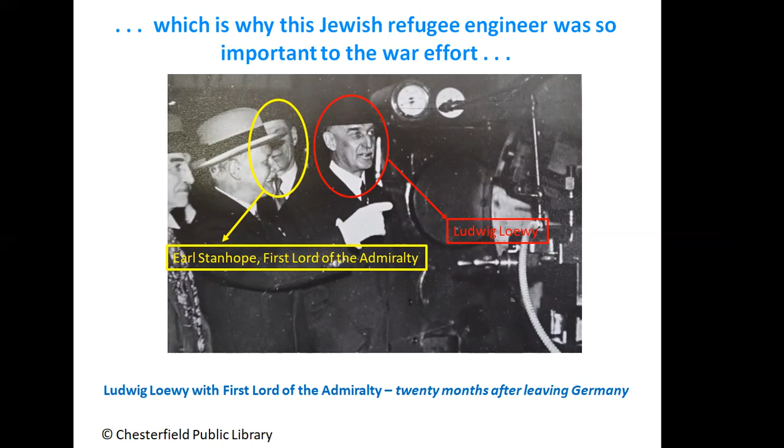We see here Ludwig Loewy with the First Lord of the Admiralty, 20 months after leaving Germany. We have Ludwig here on the right as a guest of honour at the opening of the Chesterfield Heavy Tube Department. And there behind his shoulder is Earl Stanhope, First Lord of the Admiralty, who was the political head of the Navy, subsequently supplanted by Churchill himself not long after this photo was taken. So Ludwig Loewy is going to turn out to be rather crucial to the story of rearmament and aircraft development, and he was, as you'll discover, going to become something of a celebrity engineer during the early wartime period.

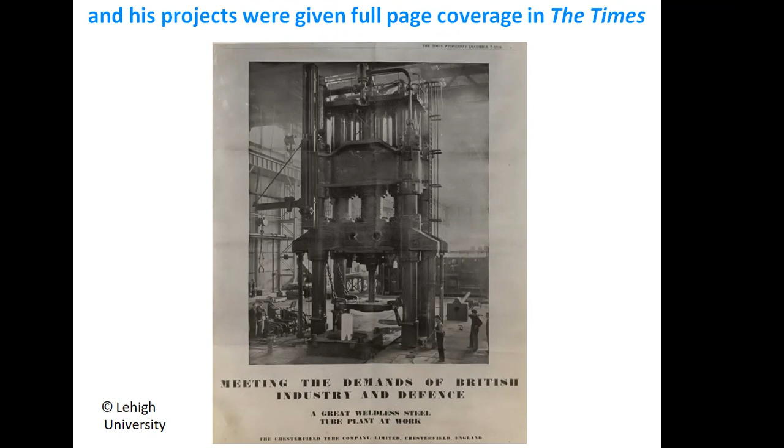For instance, here is an example: his projects were given full page coverage in the Times. Movietone News turned up to the opening, and the BBC sent one of the various Dimblebys who were around at the time to cover the opening. This is all within a few months of him coming as an exile to Britain. So Ludwig Loewy is going to turn out to be crucial to the British war effort.

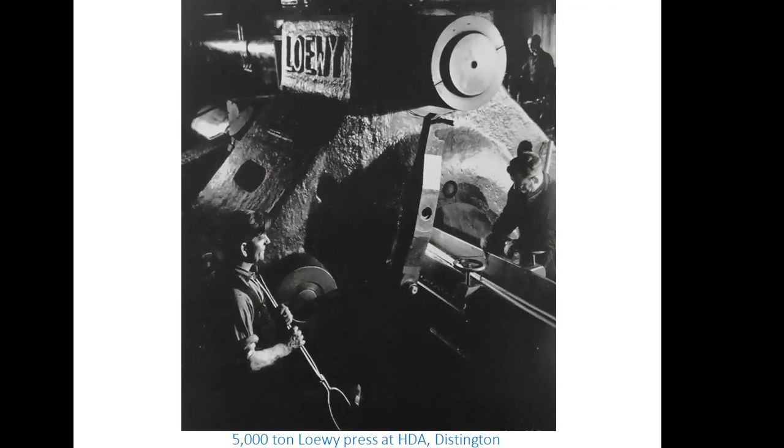But in order to explain why he was so important to the war effort, I first have to tell you one or two basic facts which are not familiar about the way in which Britain rearmed during the 1930s. And one particular key component that I'm going to talk about is extrusion presses.

Ludwig Loewy's German firm, Schloemann, from which he was exiled, dominated the global supply of extrusion presses, which were essential for forming aluminium alloys for the new generation of aircraft. This is one with his name on it, Loewy, up at Distington in Cumbria at a high-duty alloys factory that they developed from 1940 onwards.

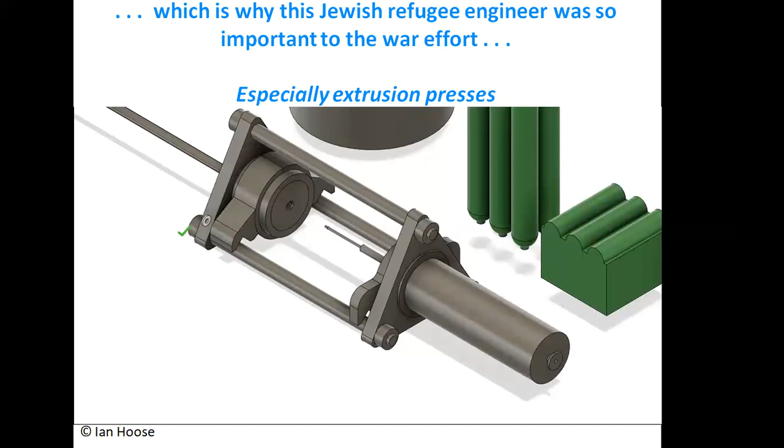But just in case you're unfamiliar with extrusion presses, let me give you an animated example. With luck, this will work. What you can see is some hydraulic cylinders in the background and some cylinders that move. So what you do is you push a hot billet, there a mandrel comes forward, puts a hole in it, and then it pushes the hot billet under tremendous pressure through to form a tube coming out the other end. It's a way of forming aluminium alloys, stainless steel, and a number of other useful wartime materials.

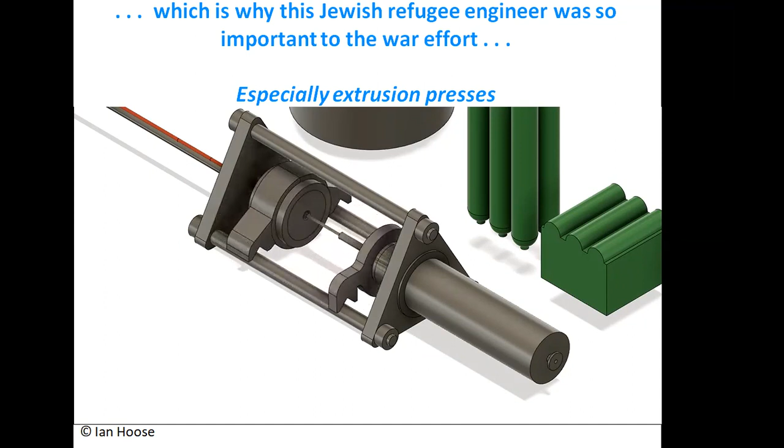Unfortunately, this technology was dominated by the Germans.

Okay, let me shock you with 4 facts about Britain's pre-war rearmament.

The first one is just how far and how fast UK aircraft production expanded during the 1930s. Between 1934 and the height of the bomber program in 1944, UK aircraft output, adjusted by weight and volume and complexity, rose almost exactly 100 times, 100-fold. So imagine any other industry in a decade, in 10 years, expanding 100-fold, most of that between about 1936 and 1942.

Secondly, as I will illustrate, aircraft switched from being a branch of the furniture industry, because they were fabric-covered wooden biplanes, to monoplanes made of these modern sophisticated aluminium and magnesium alloys.

Okay, that much may be familiar to those of you who are very keen on going to air shows and keen on the way the aircraft industry developed. Facts 3 and 4 are somewhat more unknown and shocking.

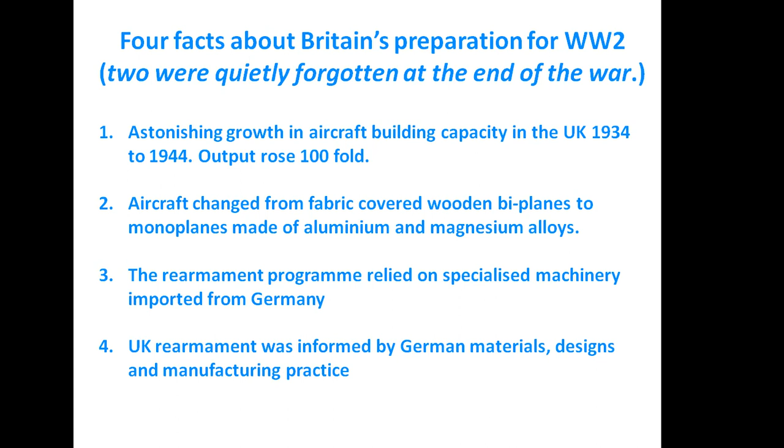Okay, so to sum up, the RAF that won the Battle of Britain depended almost entirely on German machinery and know-how imported into Britain. All right.

Now, in this crazy world that we have in the 1930s, some famous German planes were, of course, prototyped with Rolls-Royce engines in unusual places like Sweden. So I believe, for instance, the Stuka and the ME-109 first flew with Rolls-Royce engines.

So having upset some of your preconceived notions, let's develop some of these points in more detail.

So first of all, it's very hard to measure the output of the aircraft industry in 1934 because no one bothered collecting statistics. It was very easy to establish how many horses there were and whether they were employed by the railways or in heavy draft or for recreational purposes. But the aircraft industry, no one's interested in that. So the official statistics are almost silent, certainly until 1935, on these things.

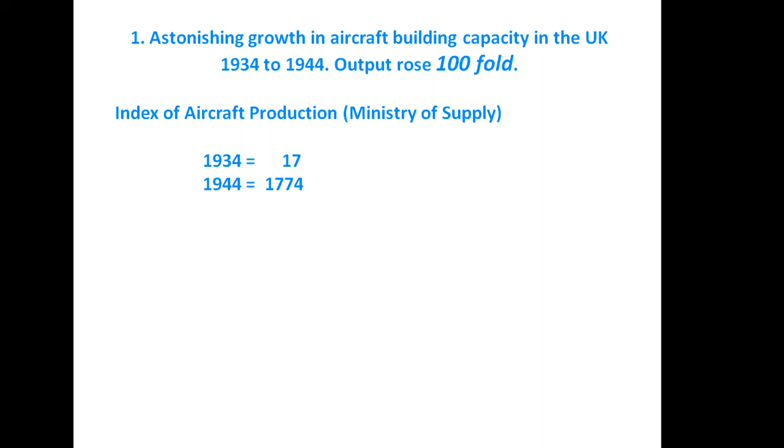But you can construct an index which goes from, as you can see, from 34 to 44. So if that index is 17 in 1934, it's literally risen by slightly over 100 times by 1944, by the height of the bomber program.

Secondly, as I said, there was radical change in aircraft design. So much so that when rearmament was being planned, the government didn't actually know what type of aircraft they would be needing when the factories were being built as part of the shadow factory program and as part of the extension of the existing aircraft factories.

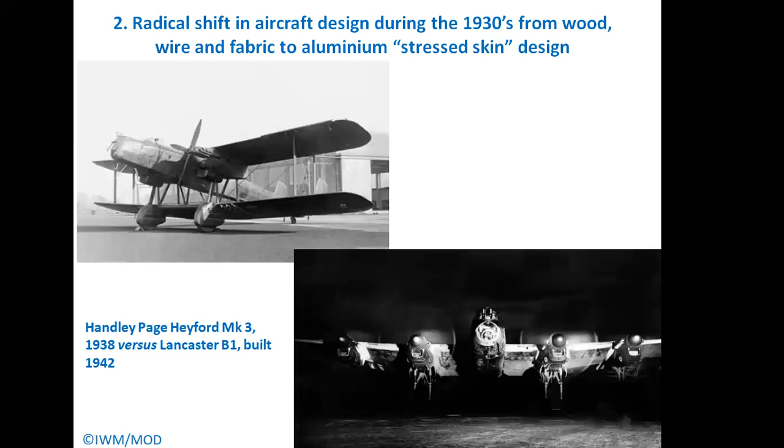In order to supply this new industry, a complete new basic industry emerged to manufacture and fabricate aluminium alloys and magnesium alloys in the UK for aircraft.

Four or five firms, all private, expanded rapidly on the back of a phenomenally fast-growing market, in the hope that peace wouldn't break out. Otherwise, they'd have been left with a hell of a lot of German equipment. And then...

the government eventually moved in. This, for instance, is a shadow factory first built on land at the back of Workington, at Distington in Cumbria, for high-duty alloys. We'll see some others as we go on.

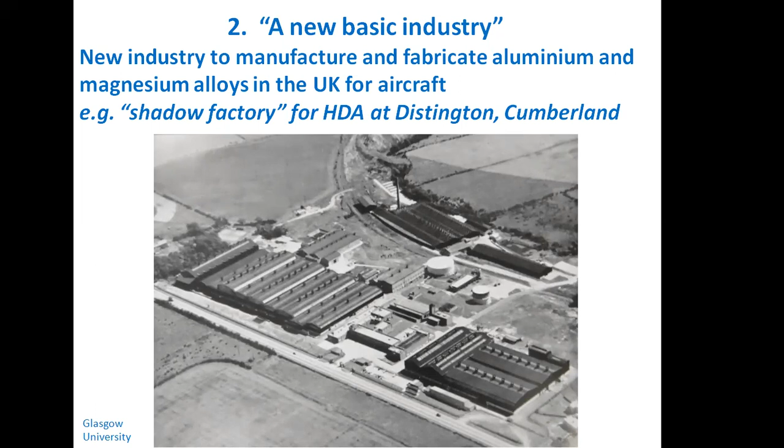So a complete new industry emerged to supply the new generation of aircraft. Some of you may remember your grandparents talking about the drive for saucepans and kettles. It's a myth that they weren't useful. It turned out that saucepans and kettles were a better source of aluminium than much of the scrap that was lurking around at the time. They turned out to be ideal for alloying into aerospace materials. But about the time of the Dunkirk evacuation, there was this scrap drive to collect old saucepans and kettles. That was just one symptom of this rise of a new basic industry.

But why should we depend upon the Germans? Well, the answer is the Germans had total leadership in aluminium and aluminium alloys during the 1930s. Not the Americans, who had barely begun. The Canadians were producing the raw metal, but it was the Germans that led the way. And by 1938, they were the world's largest aluminium producer. They had the know-how and made a quarter of the global output of the metal.

This is why, of course, all those British component suppliers went off to Germany, indulging in industrial espionage, lurking around, looking at their bright, shiny new factories in order to learn tricks. And they did learn tricks and adopted them extremely quickly.

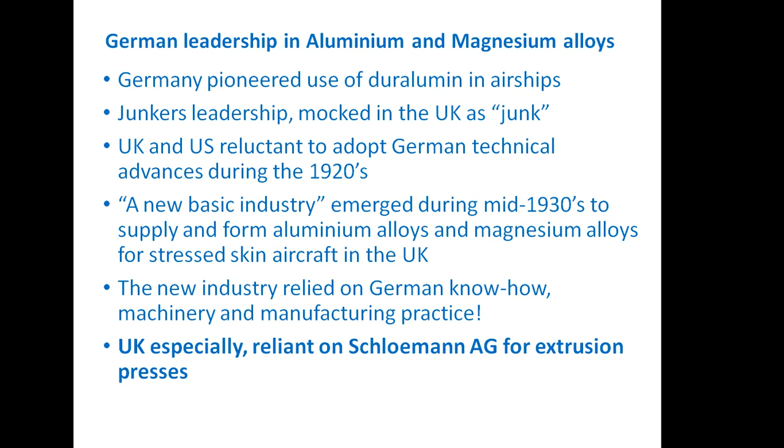Sorry, for some reason it's going back. That's because I'm holding it upside down. I do apologize.

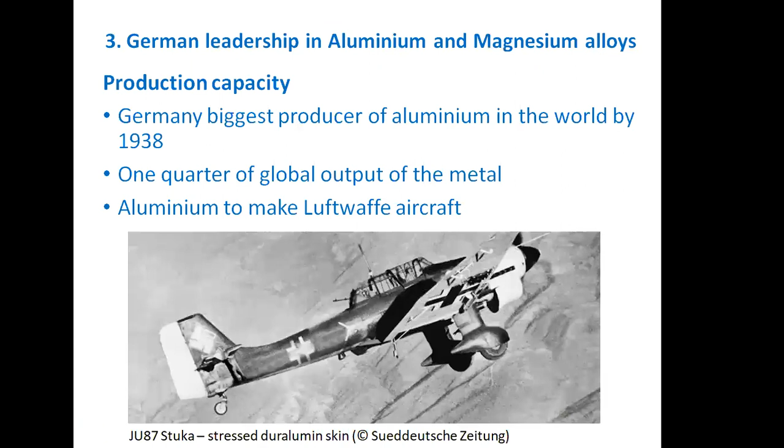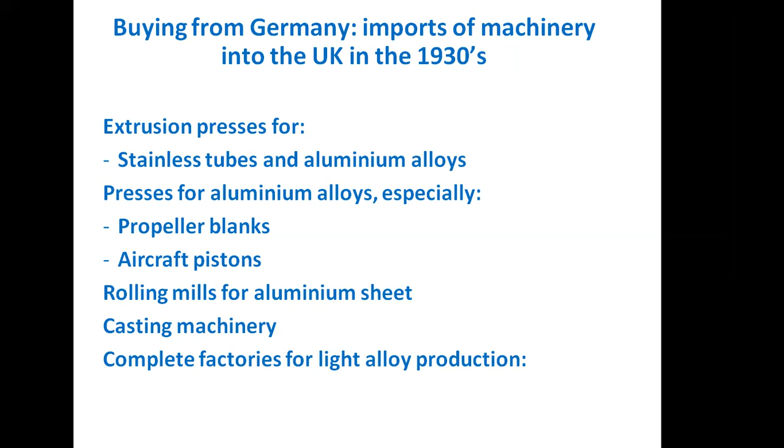And it's not only extrusion presses that we needed. We wanted presses for aluminium propeller blade blanks, for aircraft pistons. A Merlin engine, for example, is about two-thirds to three-quarters aluminium and magnesium alloy. It would be too heavy if made from steel. It needs to be forged aluminium alloy for the pistons, the conrods, the crankshafts, cast crankcases, and so on. We also needed expertise in aluminium rolling and casting machinery, and we even bought complete factories from them.

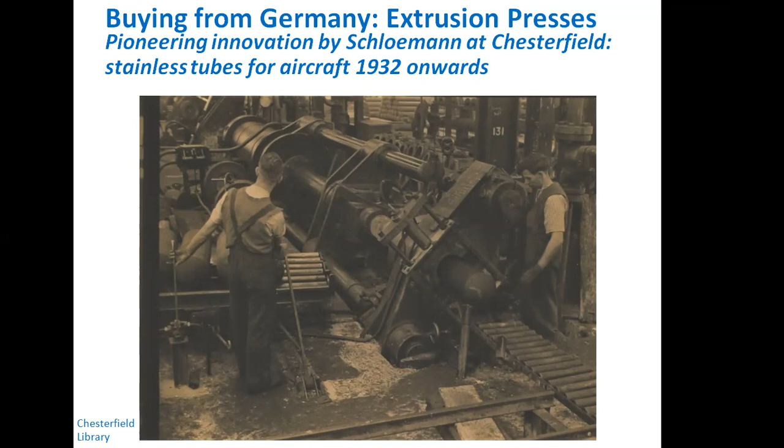He established an affinity with Britain from pioneering stainless steel tube manufacture. That, of course, went on to become the framework for a number of Second World War aircraft that were built with tubes rather than fabrications.

But for instance, this is how we got our Spitfire propeller blades. This is a huge Schloemann press at Slough, at High Duty Alloys, forging propeller blade blanks for Spitfires and subsequently Hurricanes. Hurricanes just managed to get 3-blade variable pitch propellers fitted in time for the Battle of Britain, which enhanced their performance. Firms like Rotol and so on were able to manufacture and mass produce them in large numbers just in time for the Battle of Britain.

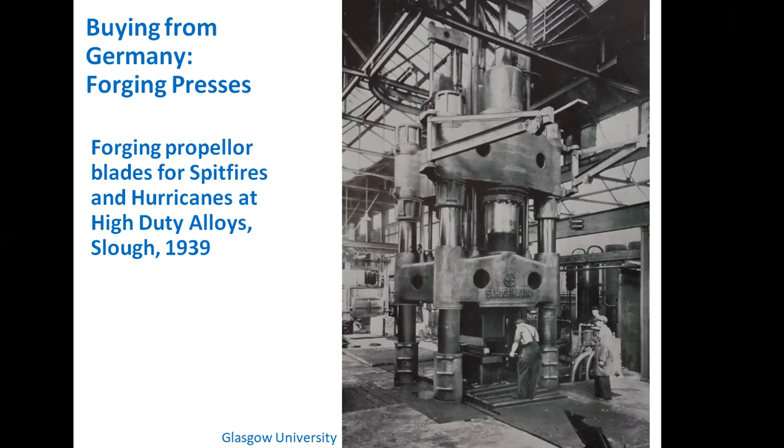This quite clearly says on it, Schloemann, across the entablature. Came straight from Germany in 1939.

Of course, there was a downside to all this. This meant when the Blitz broke out, the Germans knew exactly where to go. They marked it in red on the Ordnance Survey map. They supplied the damn plant, so the people who built it could tell them exactly where it was. There are loads of target maps like this, all for places full of German machinery. And of course, they were prime targets.

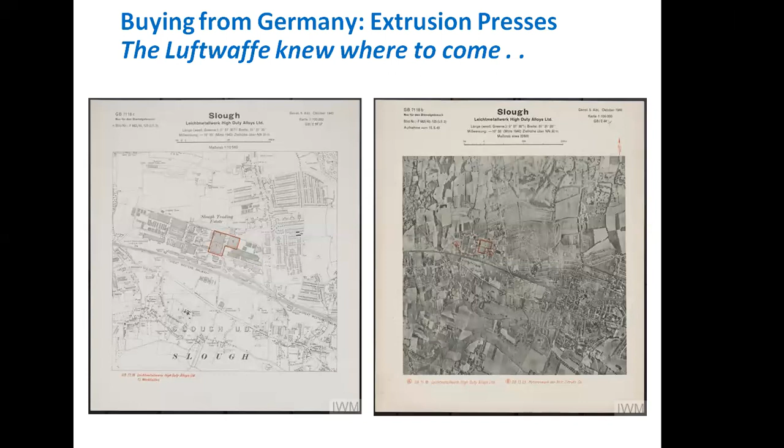Slough, as it happened, was hit by one stray bomb. Northern Aluminium at Banbury was so important for the war effort that they got technicians in from one of the film studios to build a replica 2 miles further north. It was duly bombed by a very attentive German. The replica was bombed, but High Duty, the Northern Aluminium Company in Banbury, retained their production - which is just as well, because it constituted something like a third of all the rolled sheet made there that went into British aircraft.

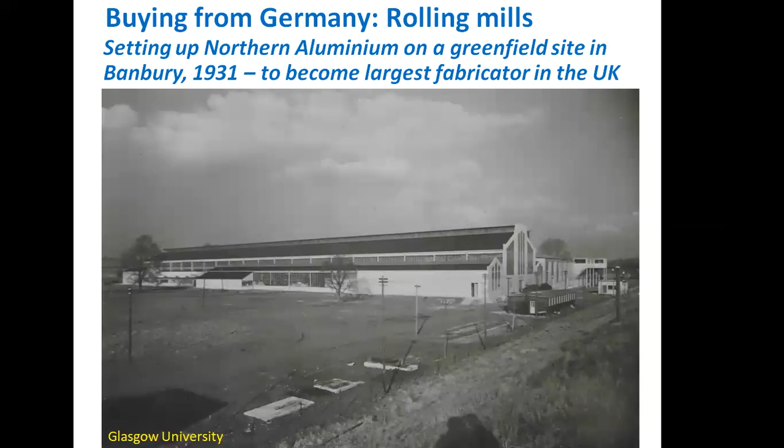So this is Northern Aluminium in 1931. That's quite simply a greenfield site. In other photos of the site, you can see sheep grazing in this field in front. This was to expand hugely between 1931 and the beginning of the war, as it became one of the premier supply centres for the Air Force. Those are the pigs of aluminium that came in from the Canadian owners - that's why it was called Northern Aluminium. Of course, it subsequently went on to be known as Alcan and so on.

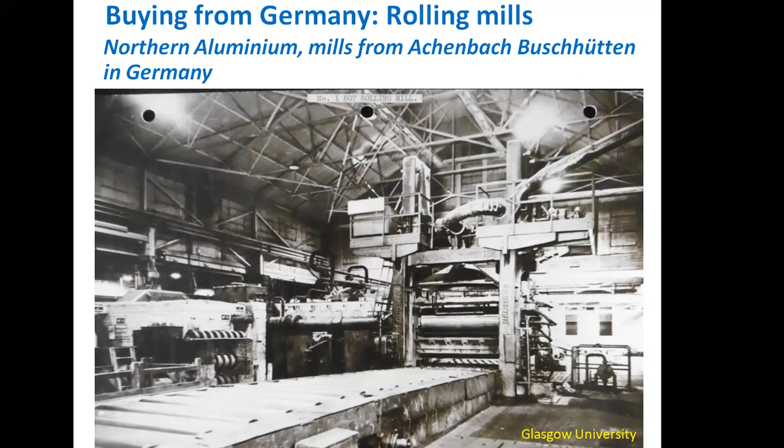But if we went inside that shed, walked past the sheep and went into this brand new plant, what will we find? A mill from Achenbach Buschhütten in Siegen, Germany, newly built and supplied. Remember that name, Achenbach Buschhütten. It's not connected with Loewy, but it's going to crop up as a major supplier to the British aluminium industry. For example, Birmetals built a brand new greenfield plant, the Woodgate Works at Quinton near Birmingham.

Almost every single item of equipment came from Germany. In fact, I can't find any that were British apart from the odd heat furnace. This is a press from Schloemann's competitor, Eumuco, who never normally exported, but somehow Birmetals managed to persuade them to sell it. They also had a Schloemann extrusion press alongside this.

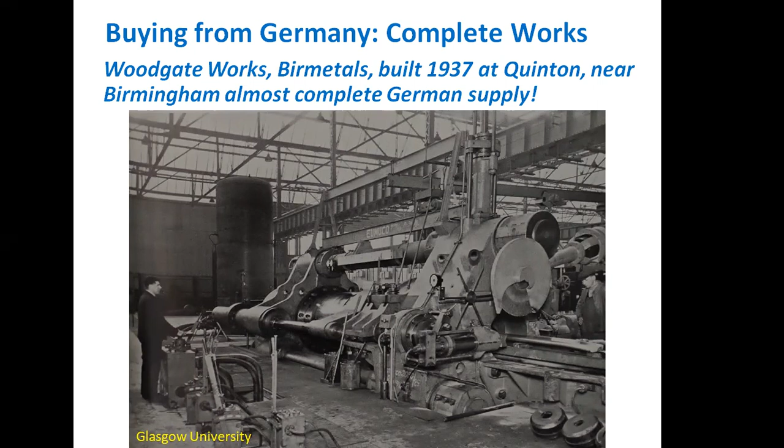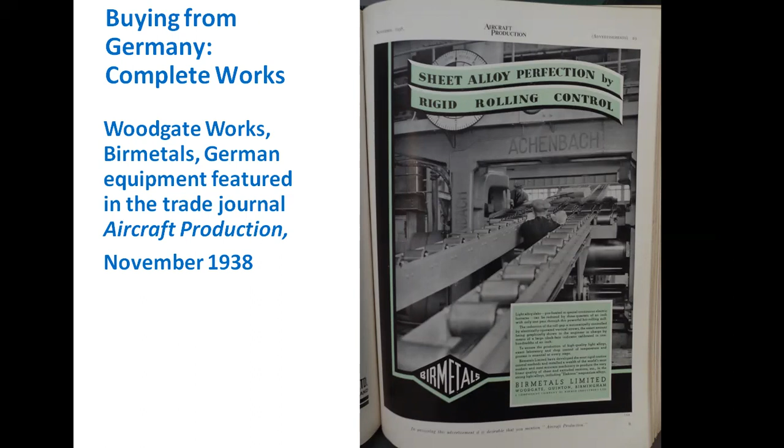And when they advertised in the Aircraft Production Trade Journal in November 1938, ten months before war broke out, there you see: sheet alloy perfection by rigid rolling control - and there is our Achenbach German rolling mill. It was a point of honour that you had German equipment. Sometimes this caused problems.

This is a lovely piece from the Warrington Guardian, which I'm sure is regular reading for all of you.

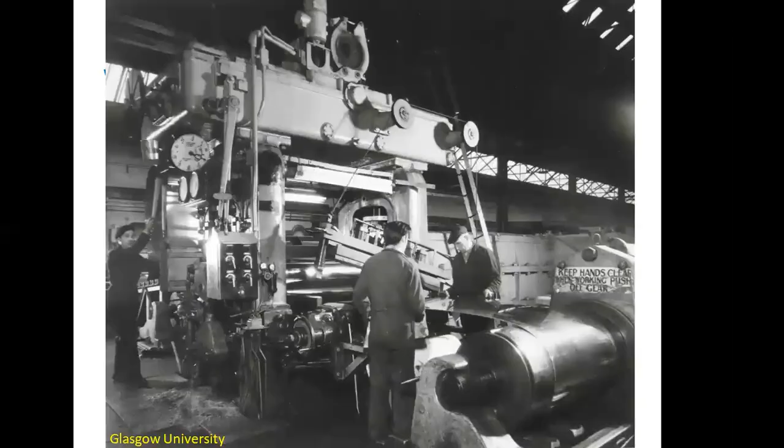Banbury, Northern Aluminium - we've seen they set up this works which was growing at breakneck speed amongst the sheep fields north of Banbury, close to the Oxford Canal. Two extrusion presses supplied by Loewy's former company, Schloemann - more on that in a minute - were almost complete when war broke out, so the technicians were interned because they were caught in Britain on September 3rd. Schloemann, the leading supplier of extrusion presses in the world, was still building two at Banbury in September 1939. We could go on, and I could bore you till midnight on other examples.

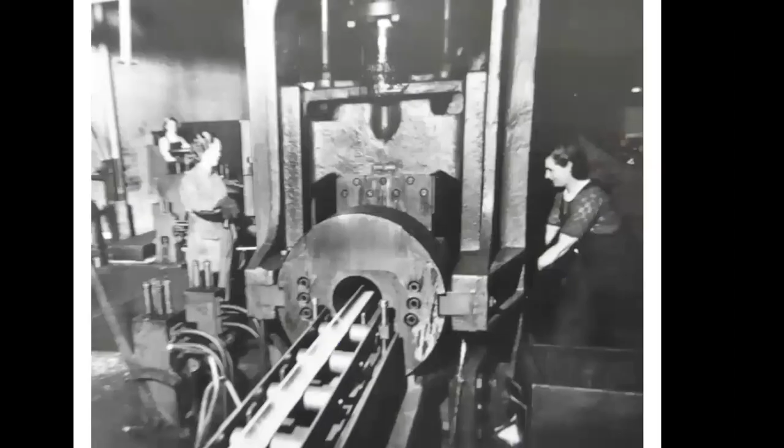This was recognized at the time. I'm not telling you anything that was new to aluminium makers at the time, because the trade journal Aircraft Production said one of the obvious results of this situation, in other words the outbreak of war, will be the cessation of the supply of tools and equipment from Germany. What a blow - our enemy will no longer be able to supply the tools and equipment.

And I should say, incidentally, this is the funny thing, and this is so good - if you go through the trade journals for the late 1930s and early 1940s, they are full of German articles. They officially said in one of the editorials, it would be stupid to stop telling you about German production techniques. We've learned so much from them that we're going to carry on publishing this backlog of articles on German production techniques so that they can help you. That's one of the better examples, but there are lots of other lovely examples - some just wonderful ones, but we haven't got time, perhaps in questions.

I said industrial espionage. There's a lovely autobiography of George Dowty that was edited by Ali McConnell - if she's listening, a thank you to her, because she inspired me on some of this. George Dowty used to go on scouting trips to Germany. He came across Buna synthetic rubber and copied that. He saw castings in magnesium alloy at the leading company, later called Mahle, at Cannstatt near Stuttgart, and he adopted that. People just went there - Fedden and all the others went to Germany and copied what the Germans were doing wholesale.

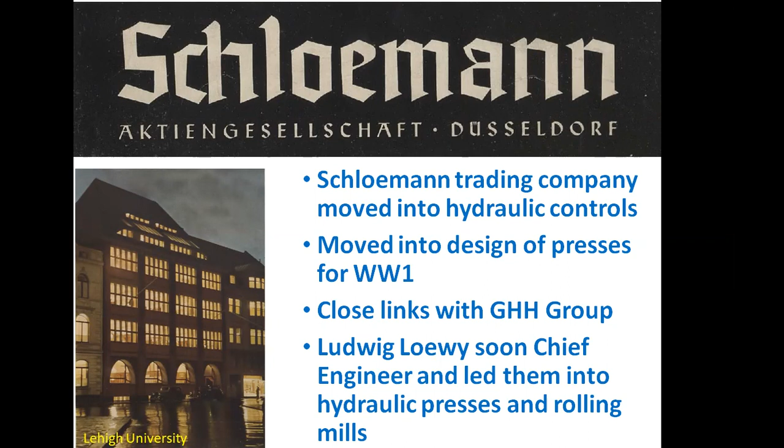So he built up Schloemann almost single-handedly alongside his partner, Poole Maltholt. He led a large export effort to the USA. Remember, the USA didn't have an aluminium industry to speak of in the 20s. He was selling copper presses for copper. Only later did they get orders from the emerging Alcoa.

He went to Japan, he sold in the Soviet Union, and then he moved to Britain. So much so that Schloemann, facing the troubles of the German economy, was 90% export during the 1930s. According to Schloemann sources, particularly the rolling mill business, for instance selling to Russia, was extremely profitable. He recruited his brother Erwin - we can tell you much more about that at question time.

But it wasn't smooth going, as you might think. Quite apart from the export travel, his partner, Poole Maltholt, was found to be embezzling money from the firm. Why this should be is not clear. It is said that he was funding the completely indigent Nazi party - the Nazi party had no funds, particularly in the early 1930s. They later got good at shaking down businessmen, but at that stage they weren't very good at shaking anyone down, and they learned very fast, shall we say.

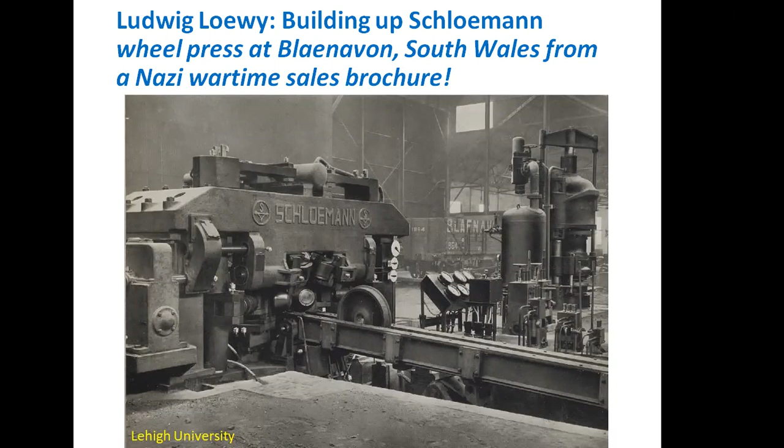Okay, that's a Nazi wartime sales brochure. Now, Ludwig Loewy was also a canny guy. He took a lot of time anticipating affinity with Britain. He joined the British Institute of Metals, which was a rather unlikely thing to do, but he and one of his colleagues, Hugo Laurent, joined in November 1929.

So he became a key figure in Britain's Institute of Metals. He started a sales drive in the UK, and as we can see, he spent an enormous amount of time in Chesterfield. Let's be honest, would you want to spend an enormous amount of time in Chesterfield in the early 1930s? You probably wouldn't - developing extrusion of stainless.

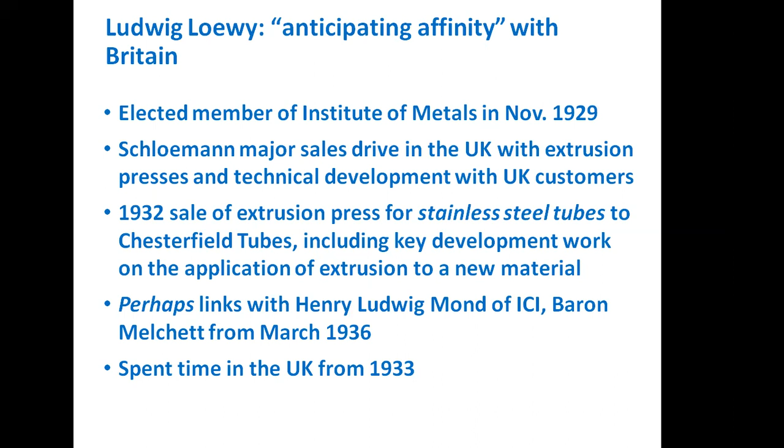We know from correspondence he was on corresponding terms with Henry Ludwig Mond, who was, of course, Baron Melchett from March 1936, and who was one of the driving forces behind ICI. His niece, who's very informative and exceptionally helpful on all this, said that he actually spent a lot of time in the UK from about 1933 onwards, which is, of course, when the Nazis came to power.

So Adolf Hitler was elected Chancellor in 1933, and from almost that moment, Jews were officially discouraged from holding any management posts in leading German companies. This was the beginning of the end for Jewish business in Germany, and Schloemann was particularly vulnerable because most of the senior engineers were actually Jewish.

And so when Ludwig Loewy decided to flee to Britain in 1936, his senior Jewish colleagues were keen to come with him - meaning that the intellectual know-how, Schloemann, the world's leading extrusion supplier at a time of global rearmament of aircraft, all went from Dusseldorf to London in 1936 because of Nazi persecution of the Jews.

His brother, Erwin, who was minding the shop while Ludwig was away, was intimidated out of Germany because he was courting a Gentile at the time. They used to meet in the street and go off for an innocent evening. Someone took a pot shot at him because he was a Jew courting a Gentile. That night he fled to Britain.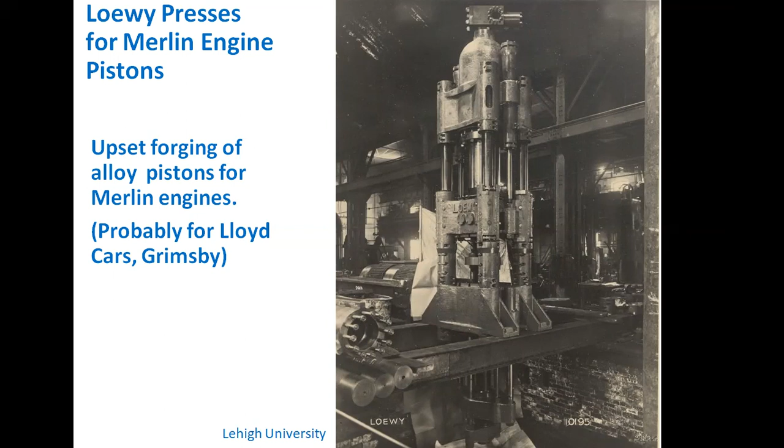He didn't just get these regular orders for aluminium. He also won a huge prestige order for a tube plant at Chesterfield Tubes to make vital boiler tubes and condenser tubes for Admiralty warships, which had hitherto come in from, you guessed it, Germany and places like that. So he designed this giant four-column hydraulic piercing press and the world's largest drawbench for making them into tubes, and won this order, which was worth 113,000, which was quite a lot of money at the time.

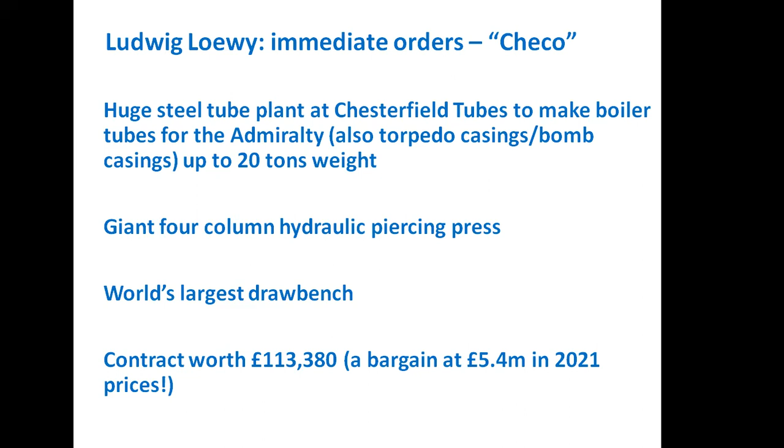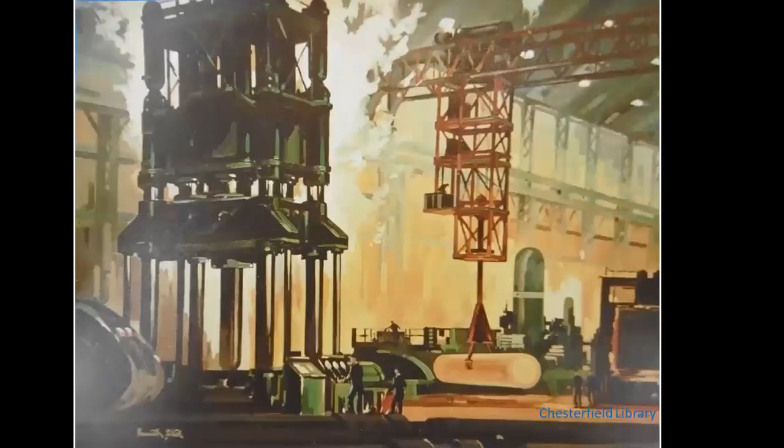I cannot, but I do have some strong evidence that Davy's were the subcontractors for this giant press. And there is an artist's impression by a Sheffield artist of this plant in operation, with a giant piercing press, which essentially just pushed a hole into a hot steel billet. When I say billet, it's actually more like a 20-ton ingot. And then this pierced tube can be pulled out into a much longer tube and shaped and formed on a draw bench. So big, hefty, solid, heavy engineering.

But of course, it was a sensitive contract. The Admiralty was behind this. We've just seen in the opening slides that the First Lord of the Admiralty was present at the celebratory opening. So why on earth did the contract go to Loewy, who was an alien who just arrived in Britain with his mates? Well, one answer is, as I say, Loewy had prior affinity with the company. He got his feet under the table at Chesterfield Tubes by helping them pioneer stainless tube manufacture. He was a known quantity to them, and so the Admiralty, the Tube Investments, were willing to take a punt on Loewy as the newcomer.

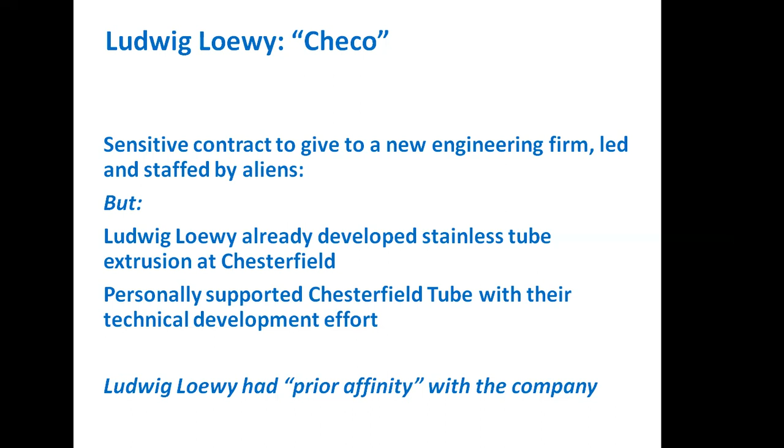And of course, it was German technology. So how on earth could they acquire the German technology if they didn't go to someone like Loewy, who knew all about draw presses and piercing presses?

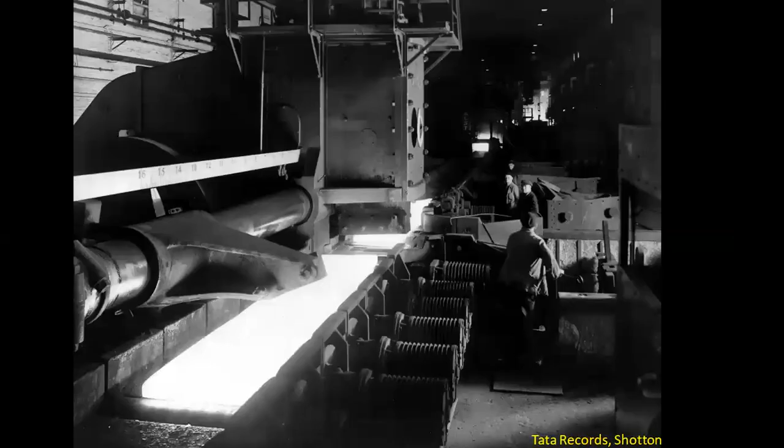He won other orders. He got a very similar huge order from John Summers, who were building the Shotton strip mill. They faced very considerable difficulties getting components, and he built this beautiful crop shear for the slabbing mill at Shotton. In the background is the Mesta blooming mill, and then it's cutting slabs off to length.

This is actually an extraordinarily innovative design. Those of you into electric motors will have already spotted these are squirrel cage motors, and this was a Schloemann pioneering technique. I won't go into the technical details of why squirrel cage motors are a very neat technical solution, but they were. He was essentially building a Schloemann run-out table for Shotton.

Of course, when the war came, it was said in his Institute of Metals obituary—remember, he was a full member—it said in the obituary he even put more effort in. And as I said in the paper, this is technology transfer with a vengeance. All right, he had good reason to look after his adoptive country.

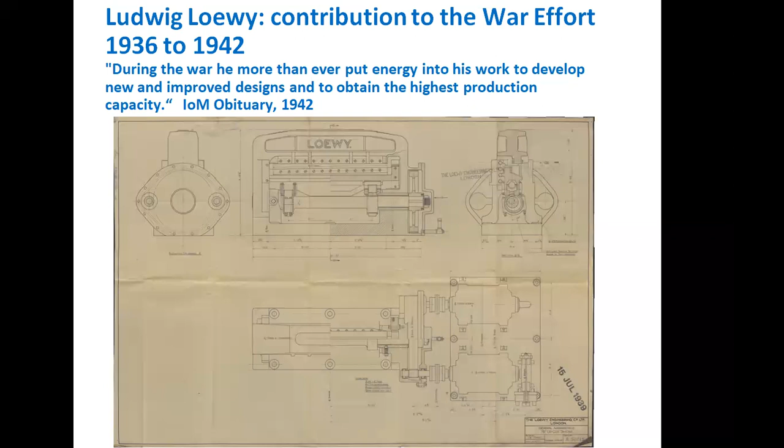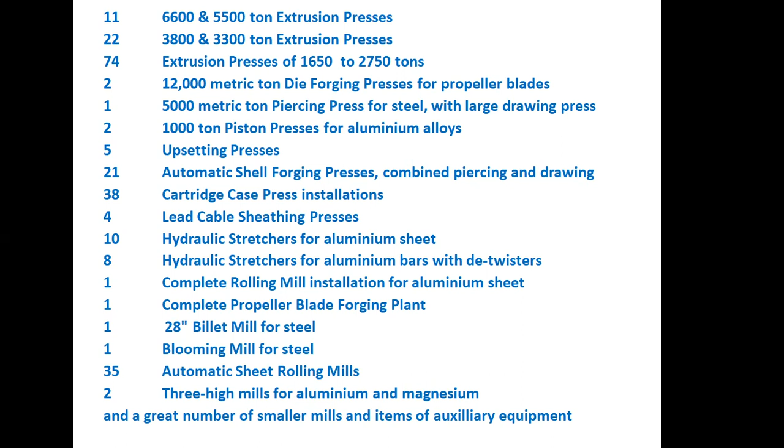And this, in short, is the kind of equipment that was supplied by Loewy Engineering by the time of his death in 1942. So you can see in the early 1930s, Britain had about 3 extrusion presses. He supplied 109, something like that, of various sizes, including all these other presses. Stretchers are needed to tension and flatten and alter the metallurgical properties of aluminium sheet. There's a complete propeller blade forging plant there, for instance, a complete rolling mill installation for aluminium sheet, lots of smaller sheet mills. You can see he made this monumental contribution to Britain's war effort.

Now, just to sum up, we're getting to the end. He was something of a celebrity. Remember, he's a foreigner, he's Jewish, he's come to Britain in April 1936. By 1940, he was something of a celebrity. He was technical advisor to Lord Beaverbrook, who greeted him and treated him on very friendly terms, and as far as we can judge, met him every week.

Beaverbrook, I have completely altered my view about him, having done this research, because Beaverbrook, in a most glorious and wonderful rant at the head of MI5, defended Loewy against MI5 because they were all worried that Loewy's firm was full of Germans, that they were Nazi sympathizers, feeding information back to the Germans, that they were Jewish, they couldn't be trusted, etc. But Beaverbrook came out with this most glorious rant that Guy Liddell recorded in great detail; it's recorded in Guy Liddell's diaries. He was treated with incredible deference in all communications by the Ministry of Aircraft Production.